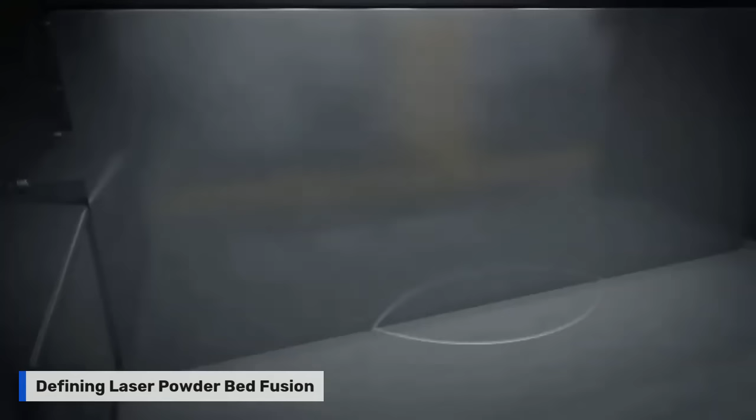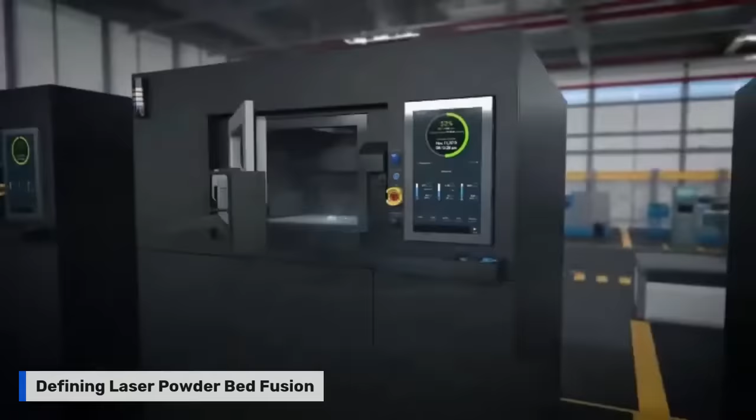And what we do is lay down very thin layers of powder, generally around 50 microns or 2/1000ths of an inch, kind of the thickness of a human hair, and then weld those with high-powered lasers to whatever's below them. And by doing this over and over and over, you end up making a three-dimensional part that's then directly usable in some pretty amazing applications.

So I'm guessing from your explanation, this technology is not new. Like, it's been around for a while. When was it invented and who invented it? Yeah, it's an interesting question, right? Because if you compare it to casting, then yeah, it's absolutely a brand new technology. But it really has been around since essentially the early 90s.

Okay. Some of the foundational patents came out of Germany. And I think Fraunhofer was one of the first places that it was really kind of put into practice. So it's been evolving over the past 25, 30 years into what it is today. And I think you're starting to see now it's becoming a real solution for production components and for these demanding applications. But yeah, originally out of Germany in the 90s.

Excellent. So if people weren't using additive or 3D metal printing, what would they be using instead? So there are other ways to make metal components, and there's a lot of them, really. Whether it's casting, kind of a near net shaped component, and then machining, whether that's milling or turning that part to get the final geometry. There's also different ways of putting parts together, whether it's brazing or welding, or otherwise building the part up from smaller individual components.

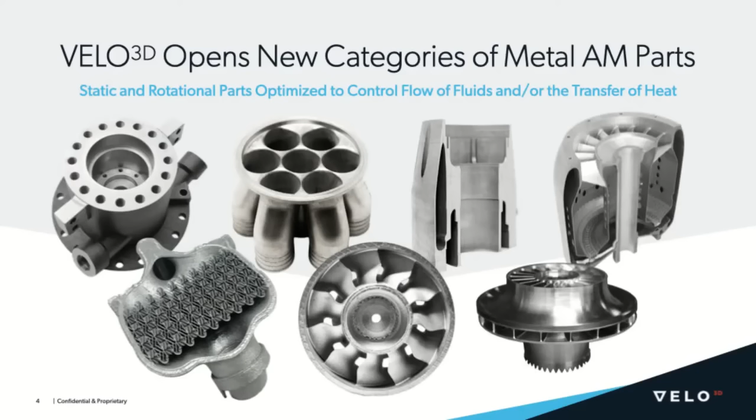And I think when you talk about post-processing, one of the things to recognize is that metal AM is a tool in a manufacturer's tool belt, and it rarely is the only tool needed to get to the final component. So like I mentioned previously, whether it's heat treatment or final machining of mating surfaces, interfaces, seals, that type of thing, there's often some amount of post-processing, surface finish, machining, heat treatment that is required before you can stick the part in an oil well or a jet engine.

Oh, there's the most famous question that we get asked. It finally came in. How is it possible that Velo3D requires almost no supports? So what is it that we do to print SupportFree?

Yeah, it's my favorite question too at this point. And it came in 21 minutes after the hour, so just putting that out there. So we're on record. Yeah.

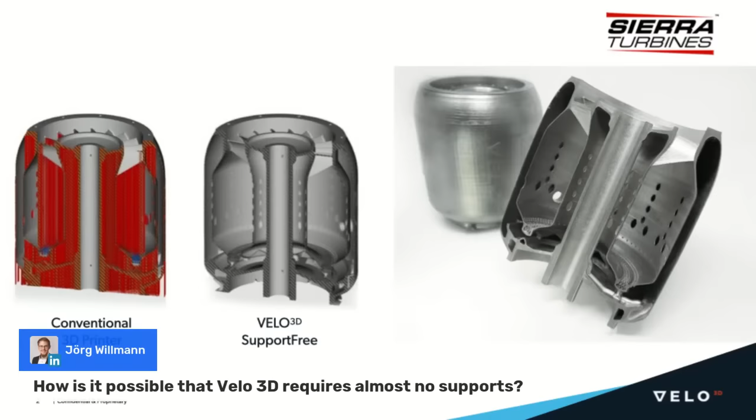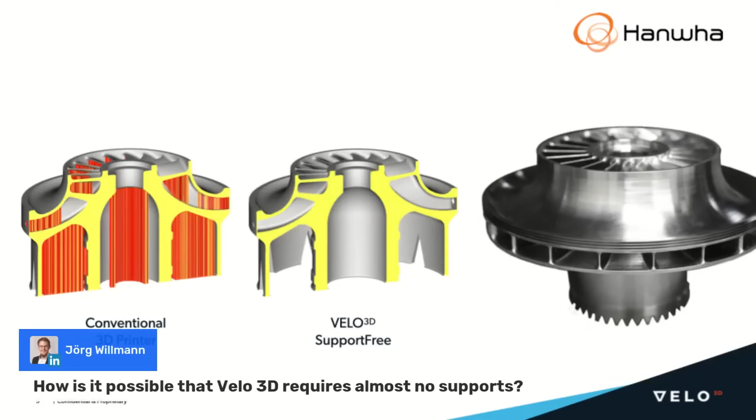I always like to say the answer is probably less sexy than people want it to be. We're a process company at our foundation, right? So what we've done is develop a process and then build software and hardware around that process in order to allow you to print without supports. So when it comes down to what enables us to do this, it really is around process control, around knowing exactly where you're operating in terms of a viable process window, and having the hardware to implement that correctly.

So if you define the process that we've made in our print preparation software and flow very accurately and very well prescribed given certain geometries, you then have to be able to execute that as well. And that's where the Sapphire printer really comes in, both in terms of controlling the laser, right?

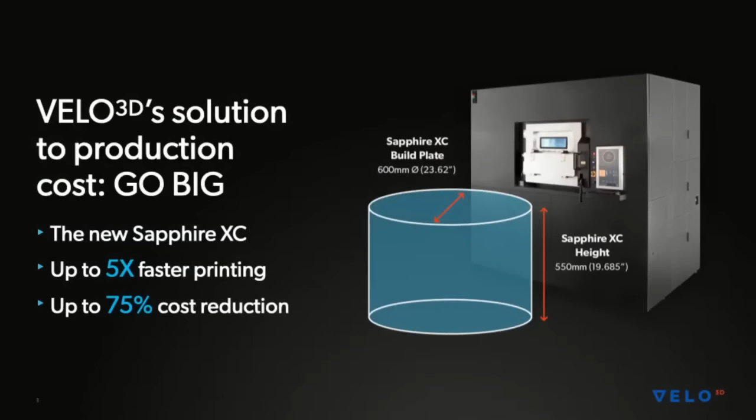In terms of the scan head system that we've developed from scratch, as well as the recoater system that gives you increased flexibility in terms of the protrusions that you can tolerate without essentially crashing your build, all of these things combine to make the process work. And that's how we can eliminate the vast majority of supports, especially as these overhanging surfaces get lower and lower.

I guess we probably should ask the first question: why do you need supports at all? Yes, or what are supports, right? Yeah, what are they? What does that mean? So as we were talking about at the beginning, this is a welding process at its core. And what you see whenever you're welding something, like if you were to take a flat piece of metal and run a weld bead down the middle of it, the part would deform. And it does that because of some of the residual stress that's imparted to it as the melt pool, the molten metal, solidifies. And in laser powder bed, the way that this manifests itself is that the part wants to stick up out of the powder bed. So as you weld it, things start to protrude.

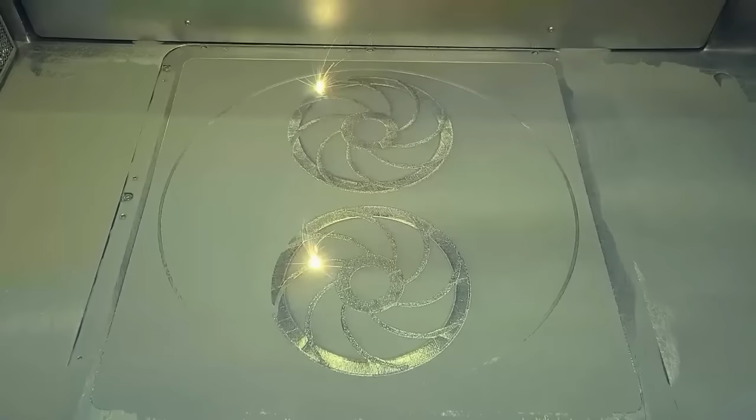And when we say supports, we're kind of doing everyone who's new to metal additive a disservice, because they're not supports. They're not intended to fight gravity. They're intended to hold the part down. Right? They're anchors. So you don't need gravity-free printing to eliminate supports. You need to eliminate these anchors and keep the part where it should be. And if you don't have the process and the recoater architecture that we have at Velo3D, you address that by applying supports.

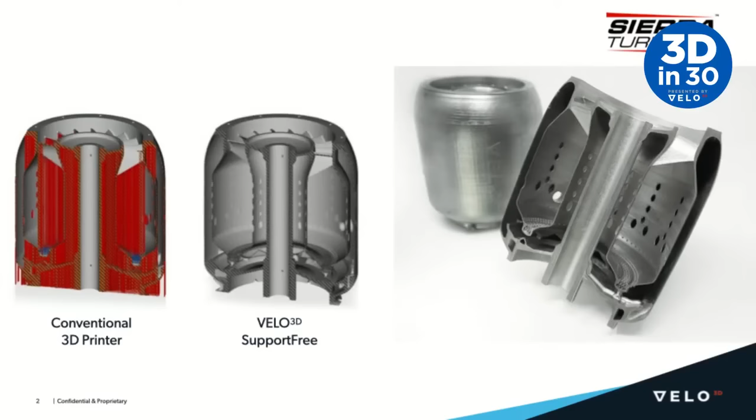And I think you saw that in one of the previous screens. You can fill these parts with supports that are printed out of the same material. So this part, as an example, is a Hastelloy X alloy, and that means that all those supports are also Hastelloy X, which is not necessarily an easy thing to deal with, especially on these internal geometries. Yeah, you can turn your printer into a $1 million staple gun really easily. And I've heard sometimes the mass for the supports can be more than the mass for the part when you're done. Yeah, with conventional printers. There are all kinds of good reasons to try to eliminate supports where you can.

Zach, what's next with laser powder bed fusion? The industry for a while has been driving towards higher productivity and larger parts. The process started on a relatively small scale with low power lasers, and one of the things that you see now is that to expand the markets that are addressable with laser powder bed fusion specifically, you need to expand the envelope of parts. So bigger parts, more lasers. So we have a product that we're starting to deliver in the fourth quarter of this year called the Sapphire XC. It's about 4 times the build area of our current system and about 5x the throughput. So in terms of cost effectiveness of the final printed part, it's really a step change in what you can address with laser powder bed.

And that's a 75% reduction, more than half. That's not 75% of what it now costs, right? Am I reading that right? If I understand your question correctly, yes. So if it costs 4 of something today, it'll cost 1 of something. Yeah, we've seen examples where it's a fifth of the cost. So you can really start to leverage that scale in production, and make some inroads into areas where right now it may not necessarily be as appropriate.